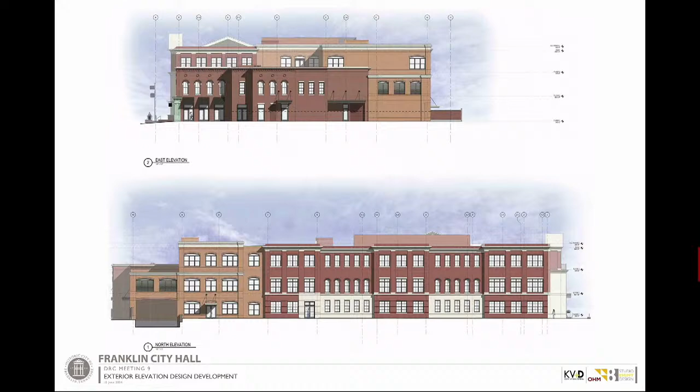So we provided some updated 3D rendering views of the building. This gives you a view of some of the changes: the canopy change, the arched windows, and the pilasters at the third level.

You can see the pediment on 3rd Avenue and how it anchors that prominent building corner. And then another view of the corner, with the pediment and without the pediment.

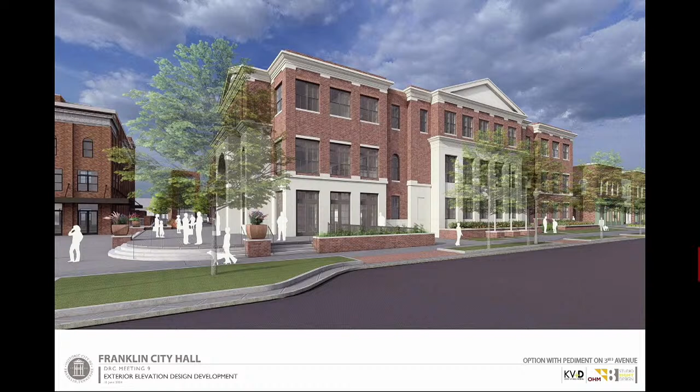And then the view of the 3-story portion of City Hall. A couple things on this elevation: we shifted the flagpole's location from the square to be in front of this boardroom portion of the elevation, signifying its civic presence, being across from the courthouse and giving the building a civic presence as you approach the square from 96.

And just getting the flagpoles out of the way of the festivals and events on the square. BOMA asked us to look at adding an ADA ramp on the 3rd Avenue side of the building, so we have. It's there in the front — you can see the railings of it with the planter out in front of it. And then you can see the commercial further down 3rd. I think that's it on this one.

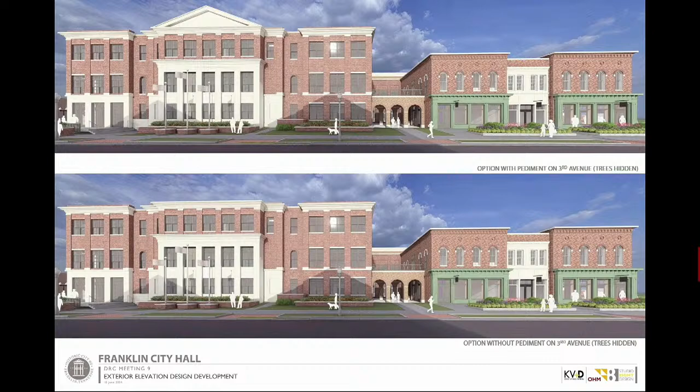Again, without the pediment. And then this is just a straight-on view, so you can see the comparison of the 3-story portion and then a straight-on view of the commercial. You can see the flagpoles in the front.

And then this is a view taken from the pedestrian view in front of the commercial, looking back towards the square. You can see the dentil work on the wood storefront surround on the center portion of the building more clearly. We're showing the possibility of arm-mounted blade signage, and we've maintained a signage band for building-mounted signage. You can see the cornice detail and the windows in more detail.

And then this is a view from across 3rd Avenue of the commercial. You can see the outdoor seating potential to the side of the commercial building. We've left the park generic for now because we want to get your feedback on our park concepts before rendering that. And then we have the screen wall for the loading service zone of City Hall that you can see in the background.

And with that, I think that's an overview of all the revisions we made. We'll leave some time for discussion. Thank you.

Kathy, do you want to kick us off? Yes, I'd be happy to.

My question about the portion of the building on the 3rd Avenue elevation that has the second pediment feature — does that section of the building have any entrance into it?

No, as you can see in this rendering — see the planter in front of it? The window sills are 4 feet high off the ground, and you can't even walk up to those windows, as a safety feature. Okay.

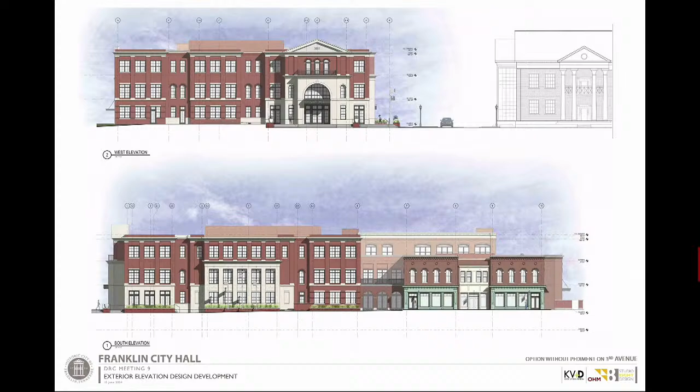I think I do agree with everyone on the pediment. I think it's handsome in that one view, but in combination with the other view, I think it's probably okay to lose it.

I think it is a useful element in breaking up that facade because it is really long, but I think that two-story limestone portion does some of that too, and I think it does it pretty well. So I could concur with everyone on that one.

The front entry, I don't see that it competes with next door all that much. In the rail and those type of things, this rail's not undercover. The other one is, it's a taller two-story porch. So I don't think it's going to read that way.

I'm reminded too that the historic courthouse, there's a reason it's the scale it was. It was built a long time ago and served this many people, and now we're talking about a much larger community, and this structure is big. It's something we've wrestled with in terms of wanting it down here, needing to be a certain size to be useful. I think you've done a good job breaking it up into pieces, and the massing has broken it into manageable pieces.

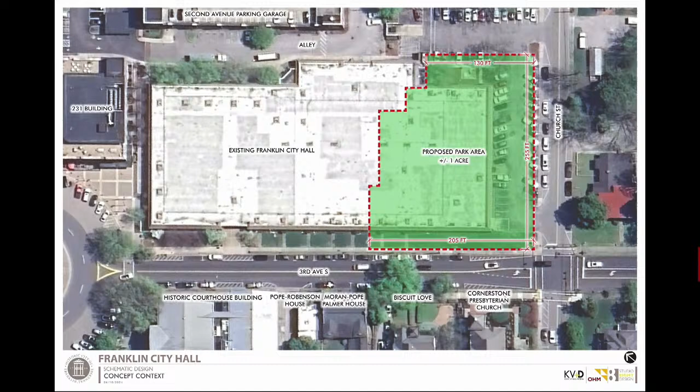And we can come back to this at the end of the presentation. So the next few slides we wanted to share are some park comparisons of existing parks in Franklin. The first being the Westhaven Fountain Park. That park is actually just over 1.2 acres, so about the same size as the park we're talking about today. If you look at the bottom corner, that also helps show the context of how big the Westhaven Park is compared to the proposed park.

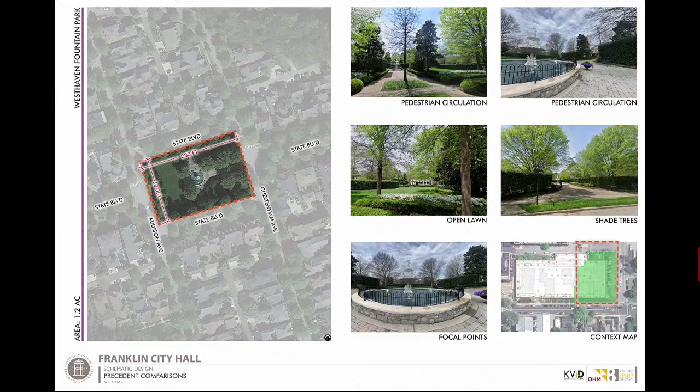And then the last part, as we're talking about each of these park comparisons, is we wanted to show some of the features that each of these parks have. We've been meeting with city staff and city leadership over the last several weeks, and one of the most important things that's stuck out to us is we want this park to be unique. So we wanted to make sure that as we're talking about park comparisons within Franklin, we're also talking about what those parks have and what this new park could have.

The second park is the one found at 5 Points, 5th Ave and Main Street. This park is actually about half the size of what the proposed City Hall Park will be, at 0.6 acres. If you look at the bottom corner of the context map, that helps highlight the size and scale of this park, along with several different features. Obviously, this park is a little bit more historic, and we'll talk more about that as we get into the design we're proposing.

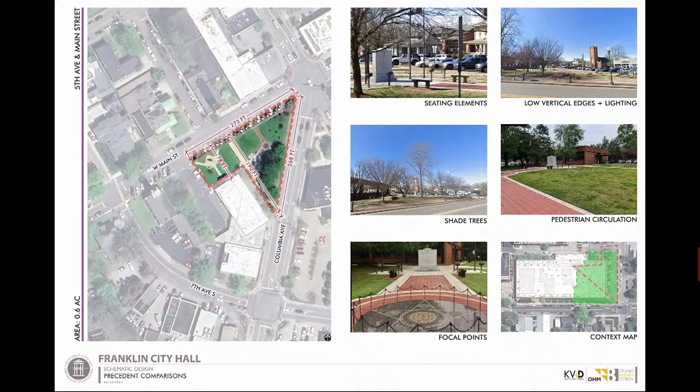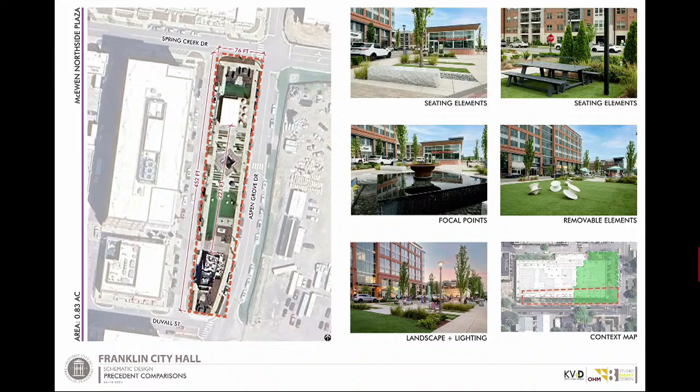As Gary mentioned, we've been working with the city, with a lot of our stakeholders, and the public. One really interesting thing that Kelly and her team did, I believe in December or January of this past year, was provide a survey for the public to respond to. One question asked was: when you think about a future park in downtown Franklin, what values are most important to you? Two of the biggest responses to that were community and belonging, and environment and natural beauty.

So just taking that as food for thought, we also compiled, along with Kelly and her team, some images that were provided by the community. These are some of the images that we felt were worth sharing, and that also blends into the second slide here.

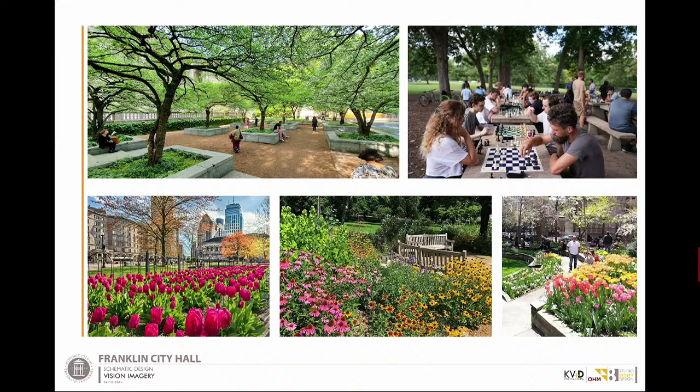Gary? Thank you. So the collaboration of the team leads us to the design, this big concept is what we want to share with you, in terms of how it translated from the city of Franklin ideals into the park design. So looking at this graphic, we have the downtown city square blocks and the Harpeth River.

Next slide, please. So the grid of the city: very defined, very regimented, very well-known and respected. Combine that with the Harpeth River. We've got these two landforms, one very gridded, one very organic and natural. Blended together, we have this idea. So we thought, how do we translate this idea into a park project design?

So we take this concept of the grid and the Harpeth River, locate that on the site as a means of coming up with a design that respects the history of the city of Franklin and its Harpeth River, and tie that to a park design that combines the grid of the city and the river. We took that same sketch over the aerial photography and dropped it on the plan, so the grid and the river, the Harpeth River, relate into the plan. You'll notice the river kind of starts along Church, navigates through the park, over to that little courtyard, and the grid animates that space as well.

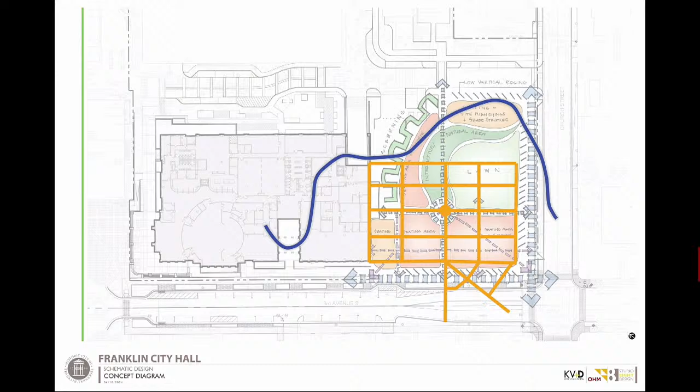Go ahead, Katie. Then you can start to see the grid is pushed to the edges of the street, along Church and Third. The organic natural space down the middle is the river circumnavigating through the space. We've got perimeter streetscape edges along Church and Third, street trees, pavers, vertical curb planters, a very vibrant streetscape creating the edges, and then internal spaces with multiple access points, multiple surface types, different elements that engage the public, the staff, and the people in the building. And then a central focal feature in the middle, kind of circular, symbolizing the square in terms of that artistic piece, showing organically how this space could function within this 1 acre size dimension.

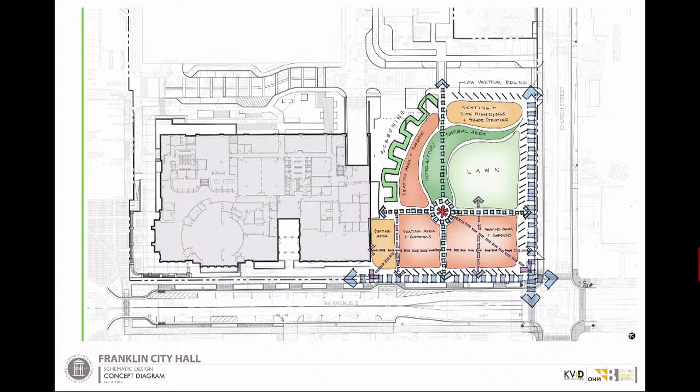So we took that concept and created this schematic design based off of that with the grid and the river. Remember, this is over structured parking. Right now it's kind of been slated to go that direction, keep the parking. That may change, but right now this plan needs to work in both regards. It's parking underneath the park and the building, so remember that.

This plan really highlights the gridded network on the bottom, Church and Third, tree wells that are seat walls, creating shade, creating the grid, different paving patterns, TBD what those will be, but a mix of different textures and colors, pulling off architectural elements, creating different spaces throughout the park. You have a central focal piece.

What I failed to mention was that diagonal edge is kind of a play off 5 Points, that angle that cuts into the grid of the city and creates that angle from the corner of Third and Church to the central piece in the middle. So the gridded portion along Church and Third, again, tree well planters, a mix of hardscapes, turf, central feature -- could be a fountain, could be a focal piece of art, could be many different things.

But again, that organic piece that weaves its way through the park is that river element that creates that organic piece of the park, that breaks up the grid, different opportunities for seating, for small and large events for staff and the community, but creating this gateway along the city edge into the community.

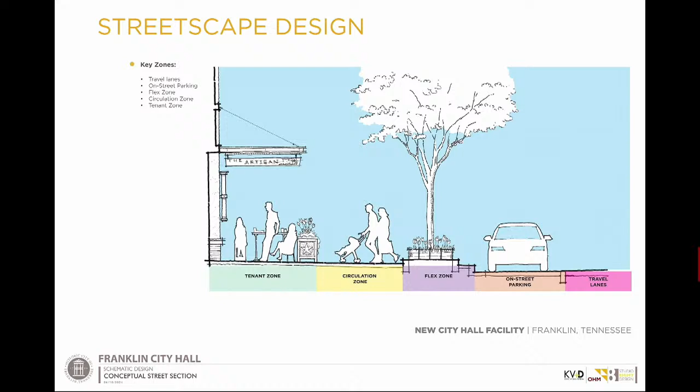And then you've got the circulation zone, which is the clear 8-foot zone that is back of the planter, enough capacity, and that's per the code in the city of Franklin. And then the tenant zone, or the building itself zone -- I know we have a commercial component as well as the building itself, but this kind of shapes that edge of what those perimeter streets look like.

We see water as just very gravitational. When you see something like that, it turns into the river piece that I'm talking about sweeping through, and we have an image that kind of shows that, but just to get the flavor of that space, that diameter circle is probably 80 feet in diameter, so very sizable. You've probably got 25 feet of pavement outside the 20-foot diameter circle in the middle. So again, different size spaces for different functions to create these organic spaces, and raise planters to make sure the trees grow on top of the structured parking.

We want to make sure we do that. So all the trees are elevated plus or minus 18 to 24 inches above the parking structure to get adequate growth and tree canopy. Next slide, Katie.

This is kind of an idea of what this little riverbed flowing through organically could be. We're showing water in this piece, some bridge elements to connect across. You've got organic seating, bridges that could be public art pieces, walls that are more organic and round, and stairs and steps, creating little pockets of organic spaces as opposed to the grid out front along Church and Third. This shows that concept of the water channel running through the space.

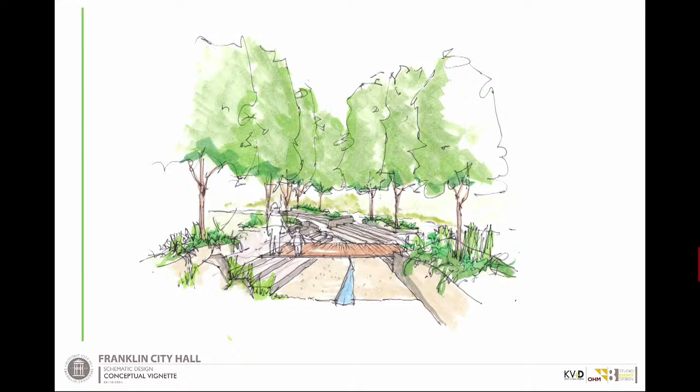So I think that's the last one. Then the overall plan there. But again, really want to anchor this corner and create something very unique, and try to tie the big idea of the city grid to the river. So be happy to answer any questions you may have about that.

Thank you. Great. Okay, Bob, we'll start with you on that end, if that's okay. Yes, I like the entrance at the corner of Third and Church. I think that looks nice. I really like the water feature. Personally, I'd like a fountain more so than a piece of art. Or could be both, the fountain could be a piece of art.

And you said there'll be parking underneath. Correct. I don't know how that works into what type of planting you have to use. I wish there could be more native plants. Absolutely, that's part of it. But I don't understand all the weight bearing and having parking underneath, a lot of details. Yeah, correct.

But yeah, we want to make sure that those trees are sustainable, and the root zone, the irrigation, native species, the whole nine yards. As you saw in those pictures in the beginning, we want a lot of color in the plant beds. We want trees, we want shade, we want all the above that the city has mentioned, the natural beauty of our city. That's it. Great. Thanks. Thanks, Brian.

So Bob's actually asked most of the questions that I have. But one curiosity, so if you do have an actual water feature that runs kind of like the river, at least from the fountain out to some part, maybe close to Church Street, are we seeing that on the drawing we're looking at here? Where would that start, at the fountain? It's that fountain, then that curve back to Church is the water feature.

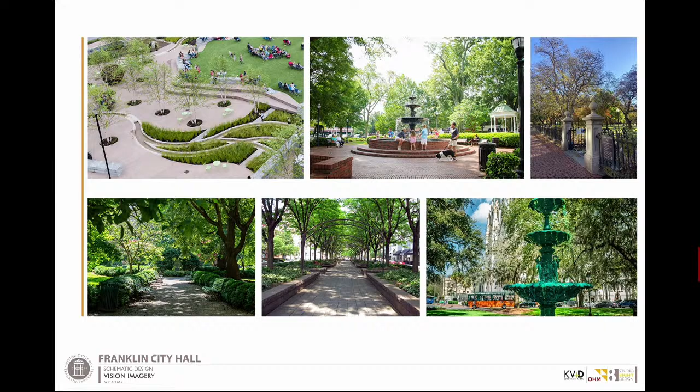So the idea there is a water runnel that has landscape around it, and you can see the water running through. You can step over it with a little footbridge - we're talking 8 to 10 inches, not a river, but it's walkable, manageable, and has to be ADA compliant. That's an idea that shows how that could be, if that helps you visualize. Thank you, it does. It's done very well there among other cities, so we thought that'd be a good image to share. Thank you, that's a great image.

Guys, I just love the design process you've shared with us on this. Thank you. The city grid.

I would like to see more evidence of the city grid in your pathways and emphasize it more, and maybe include seating along it. We only catch a few little squares of it and it's not reading full force. Does it reflect differently on the other side where the lawn is? I don't know, I've got half of the city pathways in it, but I just think it's a beautiful design. Access all the way in makes it very inclusive to the user.

I like the water features. It's how you play the materials, where it leads back from the sidewalk on further along down Third Street. I really, really appreciate what you've done. I don't know if I'd change a thing of it.

Well, I like where you're heading with this. I'd echo the comment about maybe a little less hardscape, a little more open grassed areas. Another thing you may want to consider is the opportunity to buy a brick and have a family name put on it, to incorporate. I know that's been done several places in Franklin. It'd be a good opportunity to do that again here.